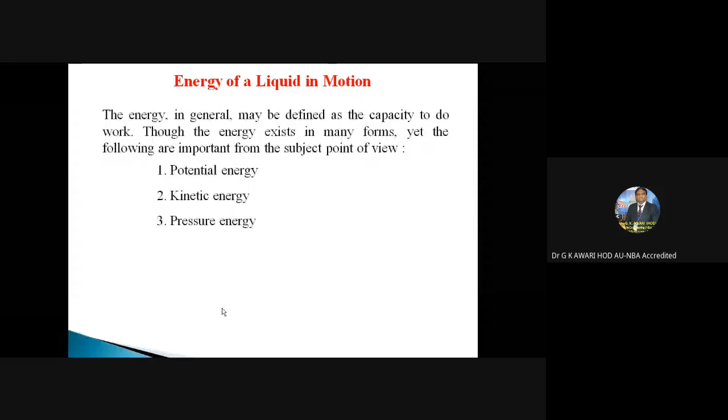And you know that energy can neither be created nor be destroyed, but one form of energy can be converted into another form of energy. So we can see in subsequent slides that pressure energy gets converted into kinetic energy. We have studied these examples also in the subject of fluid power.

So what do you mean by potential energy? Potential energy of a liquid particle in motion is the energy possessed by a liquid particle by virtue of its position. If a liquid particle is z meters above the horizontal datum, the potential energy of the particle will be z meter kilogram, briefly written as mkg per kg of the liquid. The potential head of the liquid at that point will be z meters of liquid.

For example, take the application of your hostel, your house, or a flat scheme: there is an overhead tank. In the overhead tank, a certain quantity of water is there. In that case, the level of water in the tank measured from the bottom level, which is the datum, gives the potential energy.

So when you are not using the water at the outlet end, at the user's end, the energy possessed by a liquid is nothing but the potential energy due to the datum difference. Similarly, the water in the lake, even though it is stationary, possesses potential energy. So potential energy is due to the difference in z, that is datum, and it is expressed in terms of meters of liquid.

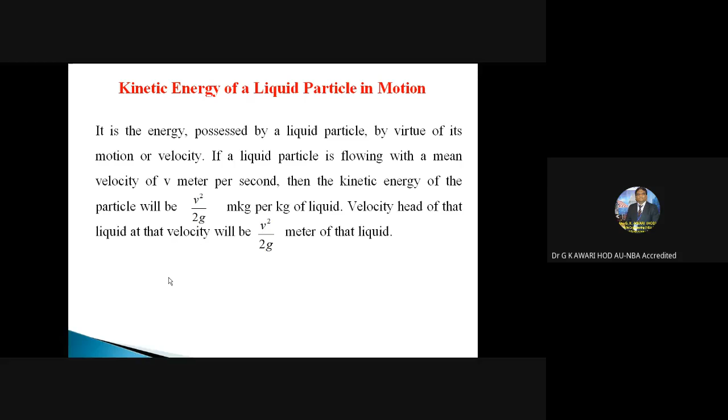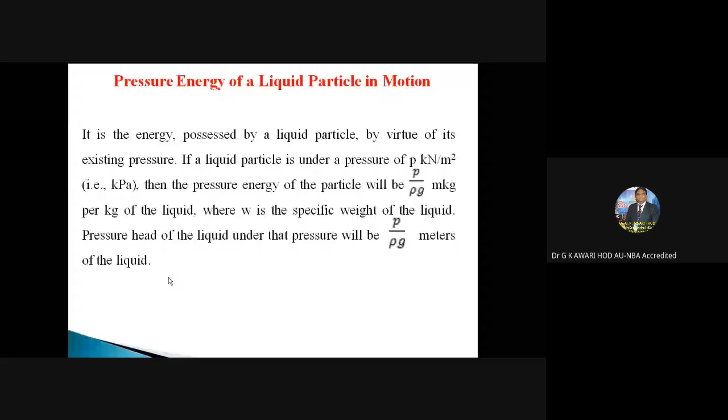Then the pressure energy of a liquid particle in motion. It is the energy possessed by a liquid particle by virtue of its existing pressure. If a liquid particle is under a pressure of P kilonewton per meter square, that is kilopascal, then the pressure energy of that particle will be P by rho g, m kg per kg of the liquid, where W is the specific weight of the liquid. Pressure head of the liquid under that pressure will be P by rho g meters of the liquid. So this is the pressure energy.

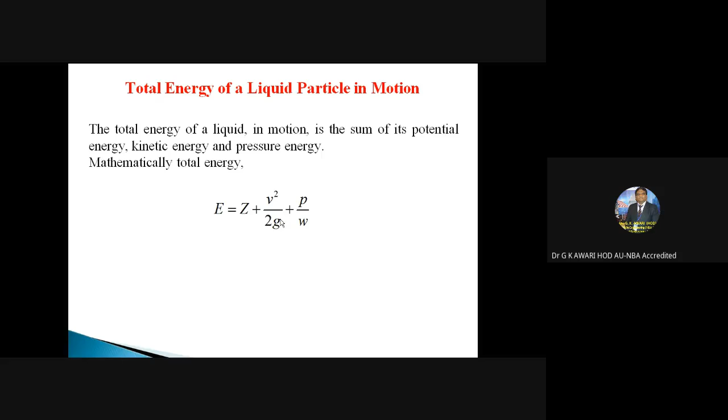Then what is the total energy of a liquid particle in motion? The total energy of a liquid in motion is the sum of its potential energy, kinetic energy, and pressure energy. Mathematically it can be expressed as E = Z + V²/2g + P/W. Z is the potential energy, V²/2g is the kinetic energy, and P/W is the pressure energy. The summation of these three energies gives us the total energy of a liquid particle in motion.

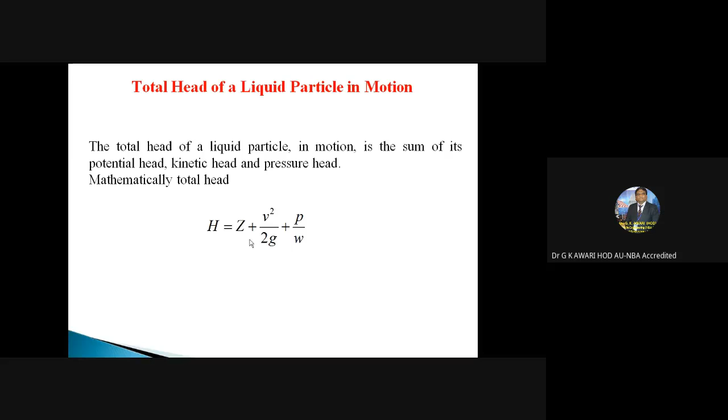Then similarly, total head of a liquid particle in motion. The total head of a liquid particle in motion is the sum of potential head, kinetic head, and pressure head. It is expressed as H = Z, the datum head, plus V²/2g plus P/W.

Bernoulli's equation was developed by Daniel Bernoulli in 1738. It states that for a perfect incompressible liquid flowing in a continuous stream, the total energy of a particle remains the same while the particle moves from one point to another. This statement is based on the assumption that there are no losses due to friction in the pipe. Mathematically, Bernoulli's equation can be expressed as Z + V²/2g + P/W = constant.

Z is potential energy, V²/2g is kinetic energy, and P/W is pressure energy. What assumptions are made by Bernoulli? Assumption number 1: no work or heat interaction between the fluid element and the surroundings takes place. The fluid must be incompressible, like liquids or water. Friction by viscous forces has to be negligible.

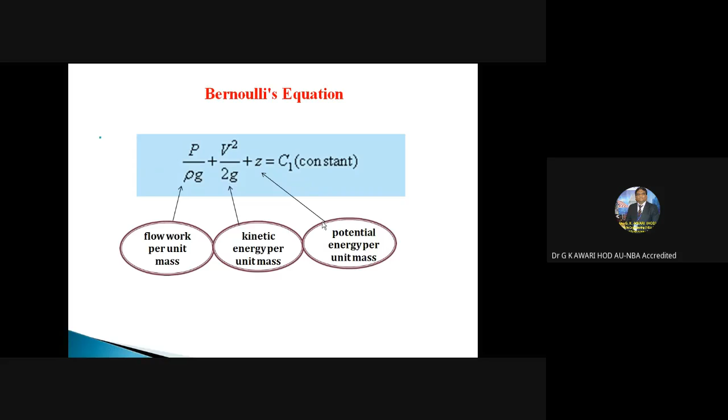So what the Bernoulli's equation suggests is that P by rho G plus V square by 2G plus Z is equal to C1, a constant, which means that at the two cross sections we have seen earlier, P1 by W plus V1 square by 2G plus Z1 is equal to P2 by W plus V2 square by 2G plus Z2. Because the total energy of a fluid remains constant. This is what has been stated by the Bernoulli's theorem.

Now, the same thing is being given here. That is, P1 by rho G plus V1 square by 2G plus Z1 is equal to P2 by rho G plus V2 square by 2G plus Z2 plus HF. What is HF? HF is nothing but the head loss due to friction. In the flow through pipe presentation, we are going to see this HF also. So this HF is added in the right hand side of the equation, means P2 by rho G plus V2 square by 2G plus Z2 plus HF.

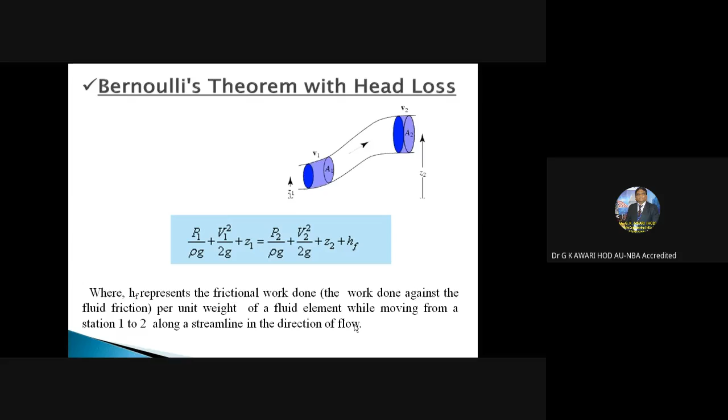We added it at cross section 2, because I have assumed the direction of flow of liquid in the upward direction from left to right. If I assume the direction of flow of water from right to left, means top to bottom, in that case this HF will be added into the left hand side of the equation. So basically HF represents the work done against fluid friction per unit weight of a fluid element while moving from station 1 to 2 along a streamline in the direction of flow. So the Bernoulli's theorem says that the total energy of the fluid remains constant at various cross sections.

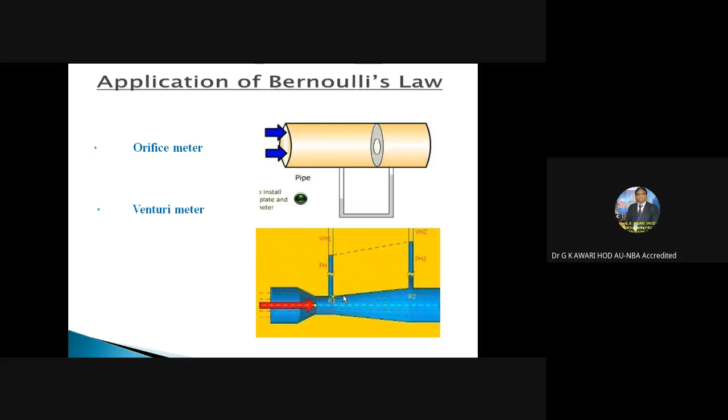Similarly, this is the second application of the Bernoulli's law, that is the Venturi meter. So you can see that the converging section, throat section and diverging section are there, and the manometer is connected to the two parts of the Venturi meter so that we can measure the pressure difference, and accordingly we can calculate the flow rate of the liquid. Now let us see the venturimeter.

The diagram is in front of you. So basically, a venturimeter is a device used for the measurement of flow in a pipeline based on the principle of Bernoulli's theorem. It consists of three parts: converging cone, short cylindrical throat, and a diverging cone. So this is nothing but your inlet section. The diameter of the inlet section is equivalent to the diameter of the pipeline where it is connected. This is your outlet section. Again, the diameter will be the same as the outlet diameter of the pipeline.

But here you can see that this portion is different. This is called the converging section. This is the throat section, and this is the diverging section. So when the fluid passes through this converging section, there is a reduction in the cross-sectional area. Because of that, the pressure energy gets converted into kinetic energy. So this converging section is like a nozzle. You might have observed the fire brigade. I will quote the example of the fire brigade.

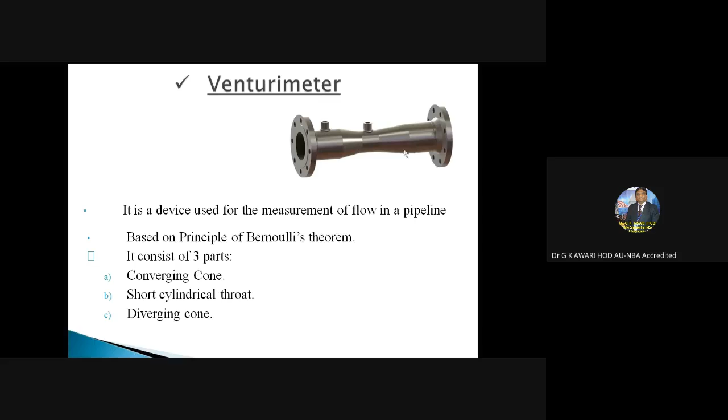So you can see that this is the throat section, and this is basically the diverging section. At this moment, you can observe that the length of the diverging section is more than the length of the converging section. So let us see now the converging section and the diverging section. The function of the converging section is to accelerate the flow and create a pressure difference between the inlet to converging cone and the throat.

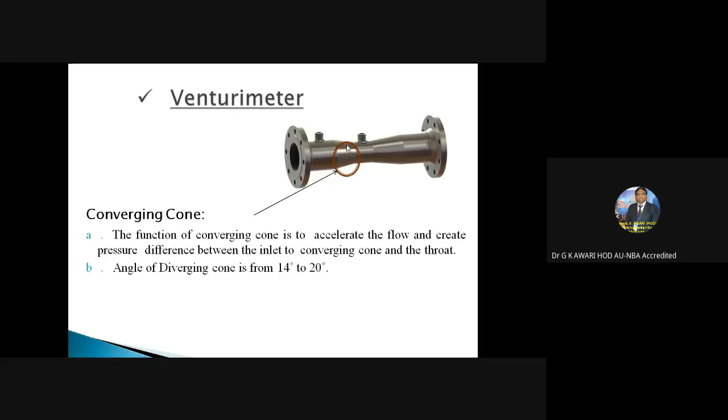And the angle of the converging cone is 14 to 20 degree. So the normal angle which is kept in the design of the venturimeter is 14 to 20 degree. So in this portion of the venturimeter, the fluid is getting accelerated. Okay, this is the throat section, that is short cylindrical throat.

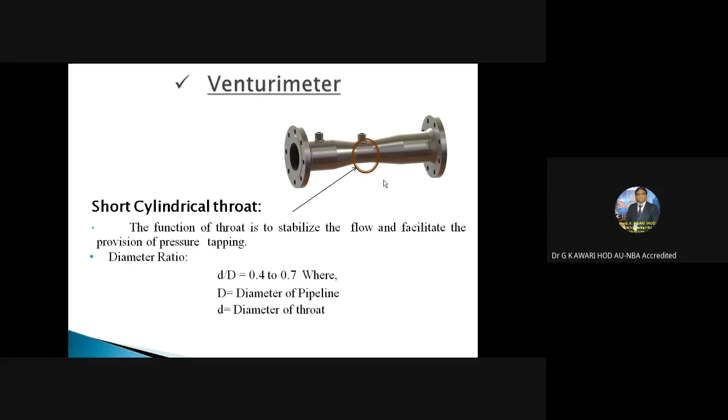The function of the throat is to stabilize the flow and facilitate the provision of pressure tapping. Okay, means here the pressure tapping is attached so that the pressure difference from the inlet to the throat section can be measured, and the diameter ratio, that is throat diameter, is 0.4 to 0.7 times of the diameter of the pipeline. This is the thumb rule or the normal design. Capital D is the diameter of the pipeline, small d is the diameter of the throat. So the diameter of the throat is 0.4 to 0.7 times the diameter of the pipeline.

Therefore, now we will go to the diverging section. The function of the diverging cone is to reduce the velocity and increase the pressure to its original value to the extent it is possibly practical. So the angle of the diverging cone is from 5 to 7 degree. वहाँ 14 से 20 डिग्री था, यहाँ 5 से 7 डिग्री है. So there is a difference between the angles. Here the angle is less, means the length of the diverging cone is more than the converging cone.

So why such a difference is there? The reason is that in this part of the venturimeter, the fluid is being retarded. The kinetic energy of the fluid passing through the diverging cone is reduced, and then we are regaining our pressure energy. So during the retardation of the fluid, there are energy losses and eddies formation in this part of the venturimeter. To minimize the energy losses and the eddies formation, the angle of the diverging cone is kept as 5 to 7 degree compared with 14 to 20 degree in case of the converging cone. So this is basically the reason.

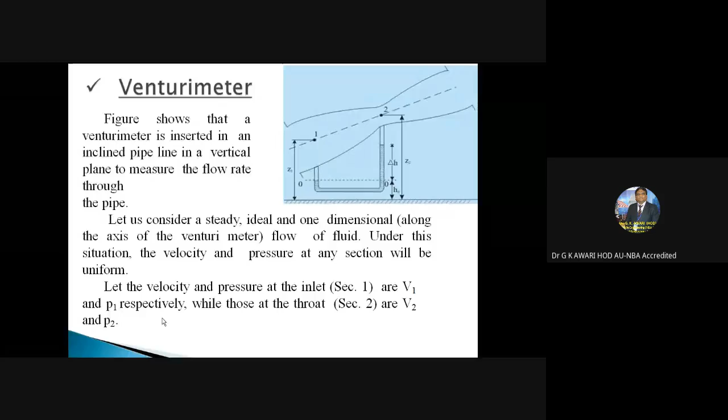So let the velocity and pressure at the inlet section, section 1, be V1, P1 respectively, and those at the throat section be V2 and P2. Now applying Bernoulli's equation between section 1 and section 2: P1/ρg + V1²/2g + Z1 = P2/ρg + V2²/2g + Z2. Bernoulli's equation says that total energy remains constant. Yeah, equal की sign दे दी. Then taking the velocity term and pressure term on one side: (V2² − V1²)/2g = (P1 − P2)/ρg + (Z1 − Z2).

Where ρ is the density of the fluid flowing through the venturimeter. From the continuity equation, ρ1A1V1 = ρ2A2V2. But naturally the liquid is incompressible, so ρ1 = ρ2, which means the ρ factor will get cancelled. So what is the value of Q? Q is nothing but A2V2 = A1V1.

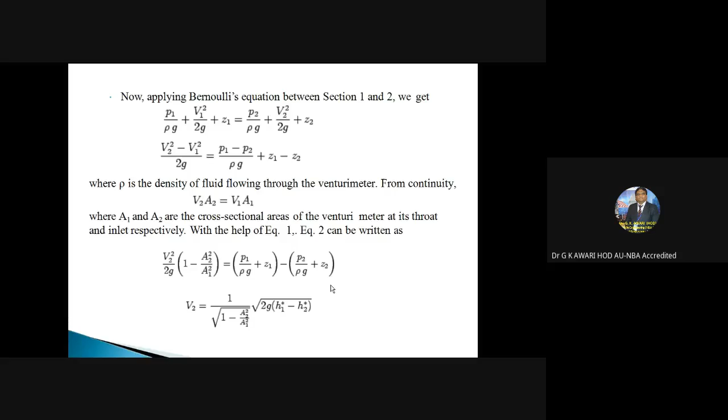So by putting this value in this equation, finally we will get the velocity of the liquid at the throat point is equal to 1 by square root of 1 minus A2 square divided by A1 square, multiplied by square root of 2g in bracket H1 minus H2. What is H1 minus H2? It is basically the manometric difference. A2 and A1, you know that it is the area at the throat section and area at the inlet section.

So H1 is equal to P1 by rho g plus Z1 and H2 is equal to P2 by rho g plus Z2. And finally, the volume flow rate through the pipe is given by Q is equal to A2 V2 is equal to A2 divided by square root of 1 minus A2 square divided by A1 square, multiplied by square root of 2g in bracket H1 minus H2. This is the equation of discharge of flow through venturimeter.

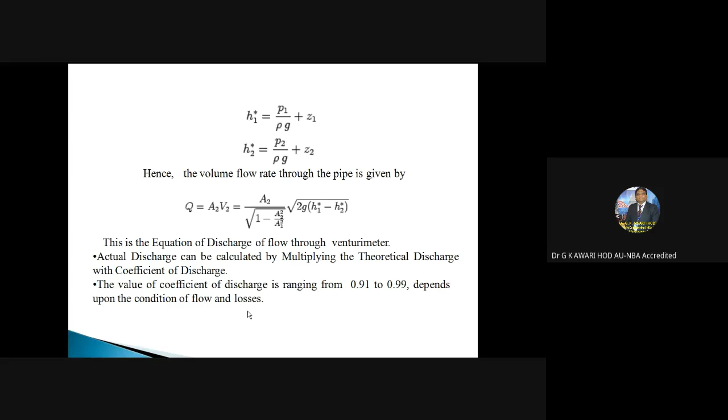Actual discharge can be calculated by multiplying the theoretical discharge with coefficient of discharge. The value of coefficient of discharge in case of venturimeter varies from 0.91 to 0.99, depending upon the condition of the flow and losses. So what is the coefficient of discharge? Actual discharge divided by the theoretical discharge is nothing but the CD, coefficient of discharge. So theoretical discharge will be more than the actual discharge.

So what are the merits and demerits of a venturimeter? The recovery of pressure is near the original value, because CD is very high. Loss of energy is minimum. Demerits are its cost is high, and it occupies more space than the orifice meter.

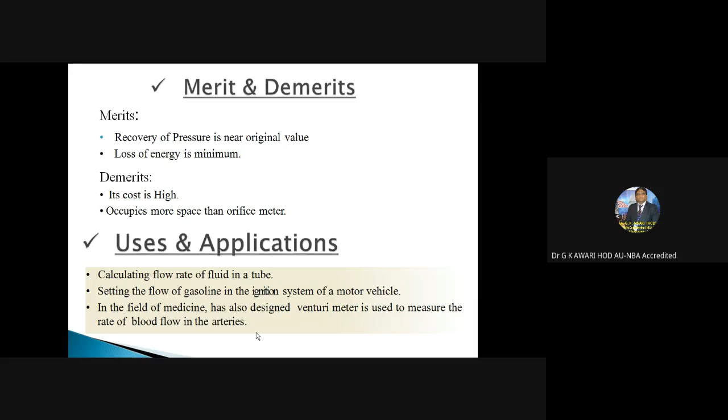Uses and applications: calculating flow rate of a fluid in a tube, setting the flow of gasoline in the ignition system of a motor vehicle. In the field of medicine, the venturimeter is used to measure the rate of blood flow in the arteries. So in the medical field, in various fields, even in industry, to measure the flow of fluid, flow of liquids or flow of water, we can use this venturimeter. So this is the first application of venturimeter.

Let us come to the second application, that is nothing but the orifice meter. The orifice meter may be installed in a pipeline with a minimum of trouble and expense. So what you can see is that this is the orifice meter, and this is the orifice plate. It is like a simple plate with a small hole, and there is a sudden contraction in the area. For example, the flow of liquid is from this direction.

Then what will happen? This orifice plate offers obstruction because of the small hole. There is a decrease in the area, and due to this, the pressure energy gets converted into kinetic energy, and at the point of the vena contracta the velocity will be more and pressure energy will be minimum. With this manometer we are measuring the pressure difference between point 1, that is the inlet section, and the point of vena contracta.

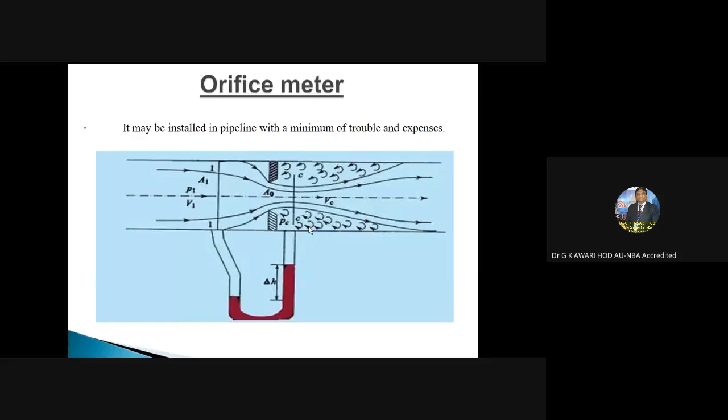And you can see that in case of the orifice meter, these circles, these lines which you can see, are all eddies formation, meaning energy loss is taking place. Why is it taking place? In case of the venturimeter, there is a gradual conversion of the pressure energy into velocity energy. But in case of the orifice meter, there is a sudden reduction in the area of the pipeline. Therefore, energy loss is more in the orifice meter, and that's why the orifice meter has a lower value of CD.

So what is the value of the CD? The coefficient of discharge is 0.6 to 0.65, meaning actual discharge is 0.6 times the theoretical discharge. So the orifice meter is a device to determine the rate of flow through the pipe. It consists of a flat circular plate which has a sharp-edged circular hole called the orifice. It is fixed concentric to the pipe.

The orifice diameter is generally kept half of the diameter of the pipe, and it is based on the same principle as explained in the venturimeter. But compared with the venturimeter, this orifice meter is economical and less space is required for fitting.

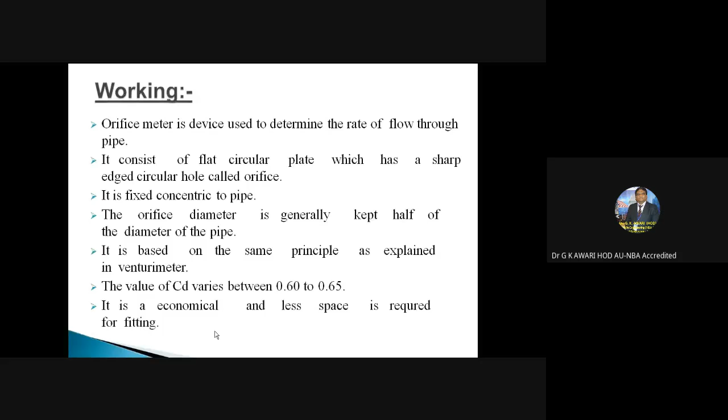So, the difference between an orifice meter and the venturimeter: for the venturimeter, there is no contraction; the area of the jet is always equal to the area of the throat. The orifice meter, by contrast, is much more affected by the variations in Cc and by the variations in Cv. Okay, so after these two applications, let us go to the next application, that is the pitot tube.

The pitot tube is a simple device used for measuring the velocity of a flow at the required point in a pipe or stream. It is also called the impact tube or stagnation tube. There is always an MCQ based on the pitot tube in the GATE examination, the IES examination, or other competitive examinations, so try to study this topic well.

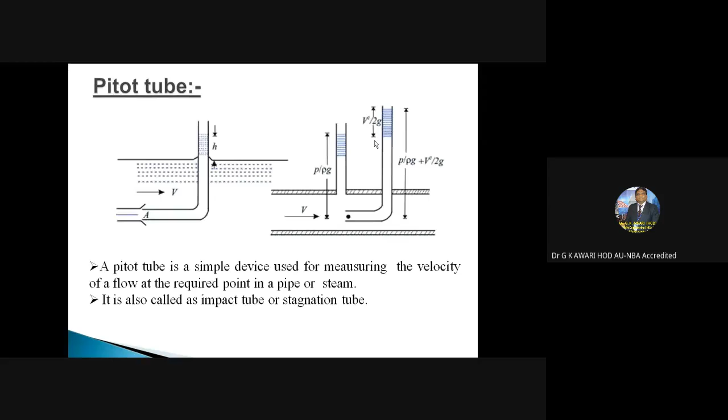A nozzle-like shape is given here at the entrance of the pitot tube. Because of that, the flowing fluid comes to rest at the inlet point of the pitot tube. That point is nothing but the stagnation point. Due to the stagnation point, there will be a pressure difference, which is recorded in the pitot tube, and from it we calculate the velocity of the fluid flowing through the pipeline.

The basic pitot tube consists of a tube pointing directly into the fluid flow. As this tube contains fluid, a pressure can be measured. The moving fluid is brought to rest, as there is no outlet to allow flow to continue. This pressure is the stagnation pressure of the fluid, also known as the total pressure or the pitot pressure. The measured stagnation pressure cannot itself be used to determine the fluid flow velocity. However, Bernoulli's equation states that stagnation pressure is equal to static pressure plus dynamic pressure.

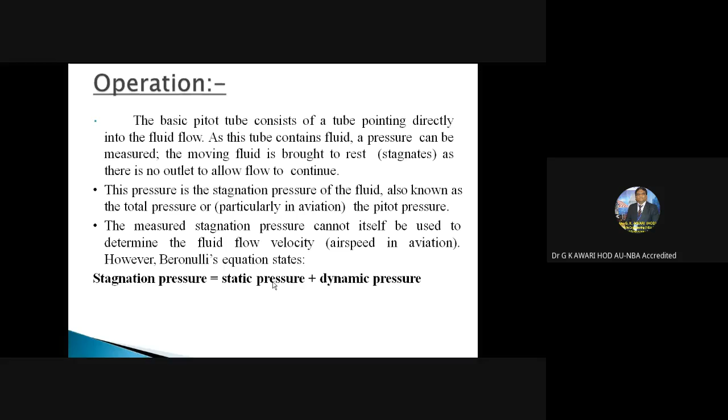So this is the first part of today's presentation. I have covered Bernoulli's theorem, Bernoulli's law, and its principle. Then I covered its applications, that is, the venturimeter, the orifice meter, and the pitot tube. So let me review like last time and ask you some questions, and then we will proceed with the next part of my presentation. Can anybody answer which topics we have covered till now? In the first part of the presentation, which topics have we covered?

Vinay is there. Vinay, Sanket Dhokle. Hello, who is speaking? Energy of liquid in motion, Bernoulli's equation. Yes, Tamgadge, Bernoulli's equation we have studied. Yes, very good. Applications of Bernoulli's theorem: orifice meter, venturi meter. Very good, Tamgadge. Okay.

And the pitot tube. Now, the next question is: what is the purpose of the pitot tube? What is the pitot tube used for? Any others? Measuring the pressure of the flow? No, that is wrong. I told you, this is for competitive examinations. The pitot tube is not used for measuring the pressure or the flow rate of the liquid. Measuring the velocity of the flow at the required point? Yes, Amir, very good. The pitot tube is used for measuring the velocity of the fluid flowing through the pipe.

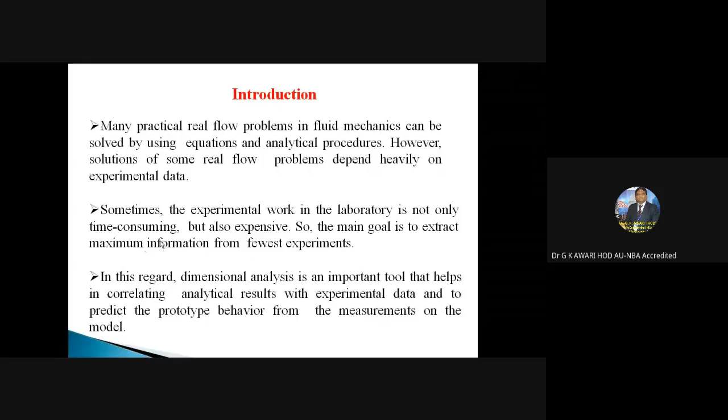So many practical real flow problems in fluid mechanics can be solved by using equations and analytical procedures. However, solutions of some real flow problems depend heavily on experimental data. Sometimes the experimental work is not only time consuming but also expensive. So the main goal is to extract maximum information from the fewest experiments. In this regard, dimensional analysis is an important tool that helps in correlating analytical results with experimental data and to predict the prototype behavior from the measurements on the model.

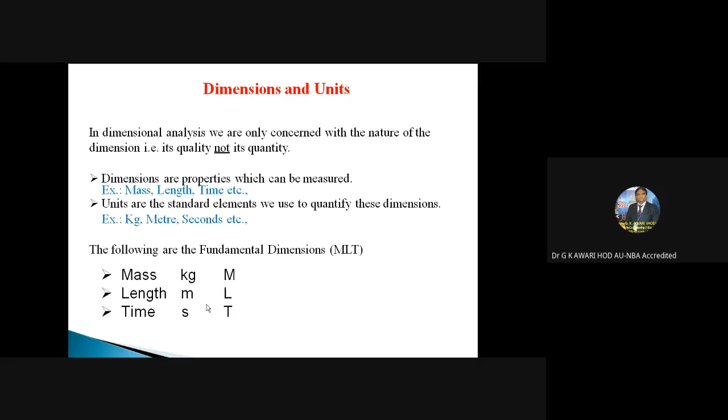The following are the fundamental dimensions, which we also studied last time. It is nothing but MLT: mass, length and time. Then the secondary or derived dimensions. Secondary dimensions are those quantities which possess more than one fundamental dimension, that is area is meter square, volume meter cube, that is L square, L cube; kinematic, that is velocity meter per second, acceleration meter per second square, and its dimensions you can see are L by T, L by T square.

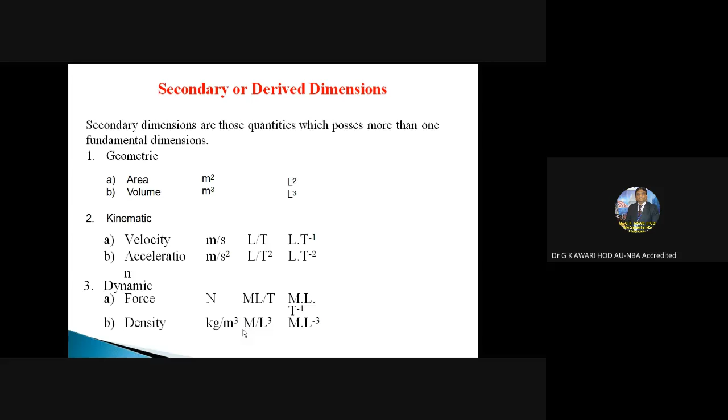Then the dynamic, that is force and density, MLT. Newton is nothing but ML divided by T squared. Here density is kg per meter cube, so M divided by L cube. So what is the use of dimensional analysis? Conversion from one dimensional unit to another. Checking units of equations, dimensional homogeneity. Defining dimensional relationships using the Rayleigh method and the Buckingham Pi method, and the fourth one is model analysis. So these are the applications of dimensional analysis.

Then dimensional homogeneity. Dimensional homogeneity means the dimensions on both sides of an equation are equal. Let us consider the equation V equals square root of 2gh. Dimensions on the left hand side: V is L by T, so LT to the power of -1. Dimensions of the right hand side are also LT to the power of -1. So the left hand side equals the right hand side, and therefore the equation V equals root of 2gh is dimensionally homogeneous. It can be used in any system of units. So dimensional homogeneity can be tested like that.

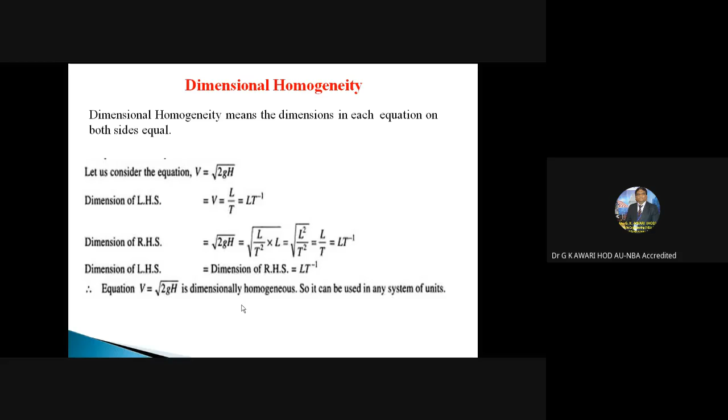So this equation is V equals square root of 2gh. We have determined the dimensions of the left hand side, which come out to be LT to the power of -1. The dimensions of the right hand side are also LT to the power of -1, which means that this equation, V equals square root of 2gh, is dimensionally homogeneous. Similarly, a dimensionally non-homogeneous equation can be tested. So this is the use of dimensional analysis, which is mostly used in the design of the turbine, the pump, or the hydroelectric power station.

Similarly, another method is there, called the Rayleigh method. The Rayleigh method is used to define the relationship among variables. This method is used for determining the expression for a variable which depends upon a maximum of 3 or 4 variables only. Methodology: let x be a function of x1, x2, x3; mathematically it can be written as x equals function of x1, x2, x3.

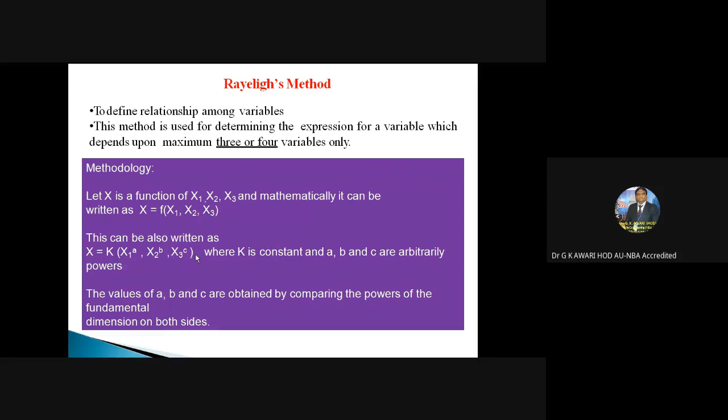So this can be written as x equals constant k times x1 to the power of a, x2 to the power of b, x3 to the power of c, where k is a constant and a, b, c are arbitrarily chosen powers. The values of a, b and c are obtained by comparing the powers of the fundamental dimensions on both sides. So this is the Rayleigh method. Let us take one example of the Rayleigh method.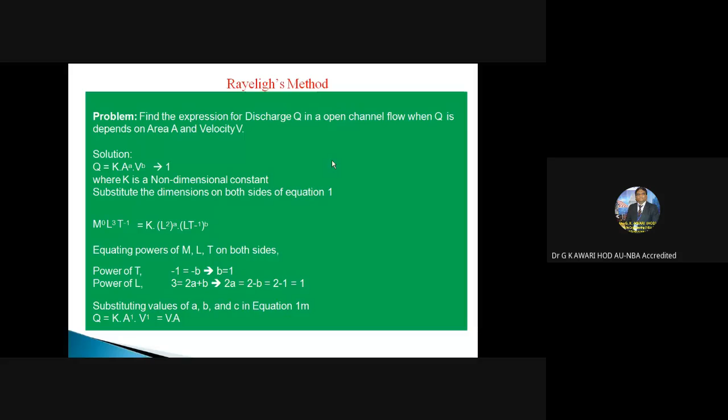So again, we check the dimensional homogeneity of the expression of Q with the help of the Rayleigh method. Similarly, the second equation is given: find the equation for the power developed by a pump if it depends on H, that is head, the discharge Q and specific weight gamma of the fluid.

Power is expressed as L² M T^-3. Head is expressed as L M^0 T^0. Discharge L³ M^0 T^-1. Similarly, specific weight, and put it here in the equation. So you can find out the value of c, b and a, and substitute these values of a, b, c in the equation.

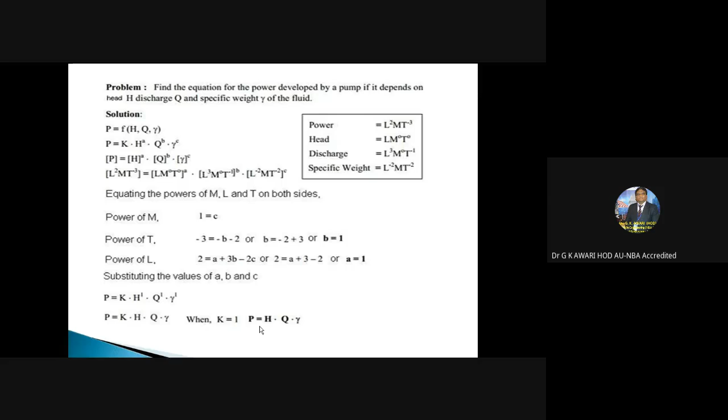So you will find out that K is equal to 1, and the equation of power P which we just found out with the help of the Rayleigh method is equal to H into Q into gamma. So this is the equation of power.

This is equation number 3: find the expression of drag force R on a smooth sphere of diameter D moving with a uniform velocity V in a fluid of density rho and dynamic viscosity mu. The function is given: force L M T^-2, mass density L^-3 M T^0. Substituting these values and equating the powers of M, T, L, finally we get R = rho V² D² phi(rho V D / mu).

So considering all these factors, by equating the powers of M, T and L, we find this equation expressing the drag force on a smooth sphere of diameter D moving with velocity V in a fluid of density rho and dynamic viscosity mu.

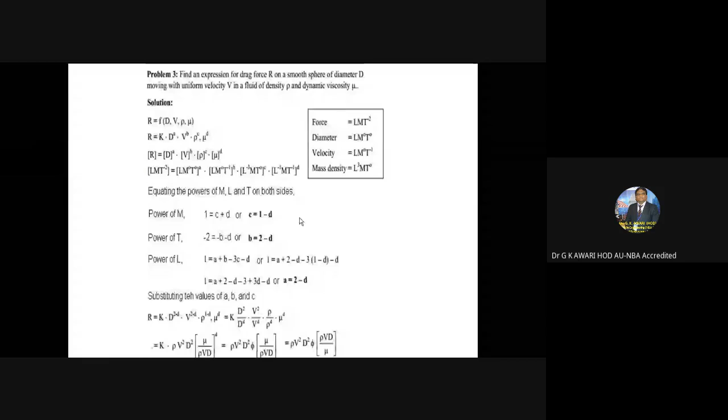Similarly, the Buckingham pi theorem. This method of analysis is used when the number of variables is more. When 3 to 4 variables are there, the Rayleigh method is easier to apply. But with the Buckingham pi method, even complicated problems where the number of variables is more can be solved.

So if there are n variables in a physical phenomenon and those n variables contain m dimensions, then the variables can be arranged into n minus m dimensionless groups called pi terms. So if f is a function of x1, x2, x3 up to xn, and the variables can be expressed using m dimensions, then f is a function of pi1, pi2, pi3 up to pi n minus m, where pi1, pi2, pi3 are dimensionless groups.

So each pi term contains m plus 1 variables, out of which m are of the repeating type and one of the non-repeating type. Each pi term is dimensionless, and dimensional homogeneity can be used to get each pi term. So pi denotes a non-dimensional parameter.

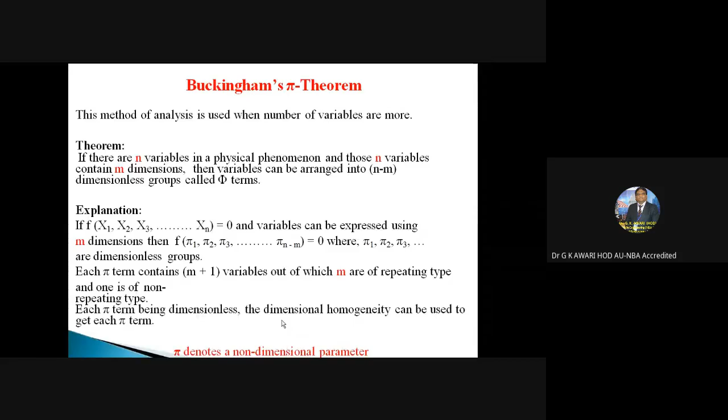Selecting the repeating variables: avoid taking the quantity required as a repeating variable. Repeating variables put together should not form dimensionless groups. No two repeating variables should have the same dimensions. Repeating variables can be selected from each of the following properties: geometric properties, which are nothing but length, height, width, and area; flow properties, like velocity, acceleration, and discharge; fluid properties like mass density, viscosity, and surface tension.

Okay. So taking the example of the Buckingham pi theorem method: the pressure difference delta P in a pipe of diameter d and length L due to viscous flow depends on the velocity v, viscosity mu, and density rho. Using Buckingham pi theorem, obtain an expression for delta P. So delta P is a function of d, L, v, mu, rho. So the total number of variables here is 6, so n is equal to 6. The total number of fundamental dimensions, m, is equal to 3.

So how many pi terms will there be? n minus m, so 6 minus 3, 3 pi terms will be there. Hence the equation is expressed as a function of pi1, pi2, pi3. Now each pi term contains m plus 1 variables, that is 3 plus 1, 4 variables. Out of the 4 variables, 3 are repeating variables.

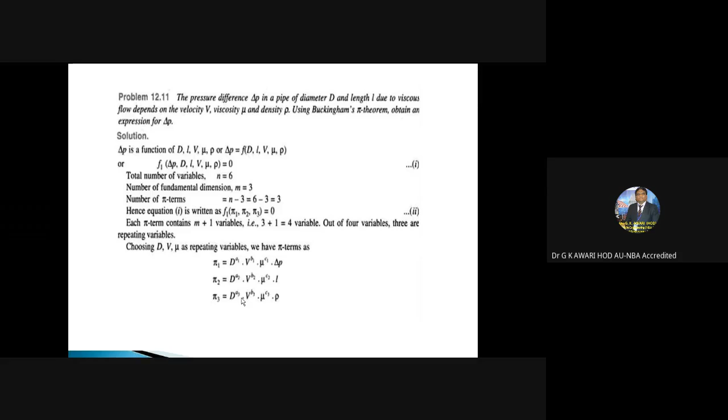Now choosing d, v, mu as repeating variables, we have the pi terms: pi1 is equal to d to the power of a1, v to the power of b1, mu to the power of c1, and delta P. Similarly, pi2 is equal to d to the power of a2, v to the power of b2, mu to the power of c2 into L. Pi3 is d to the power of a3, v to the power of b3, mu to the power of c3, and rho. Okay. So determining the first pi term, second pi term, and the third pi term. So pi1 is the equation which you have seen.

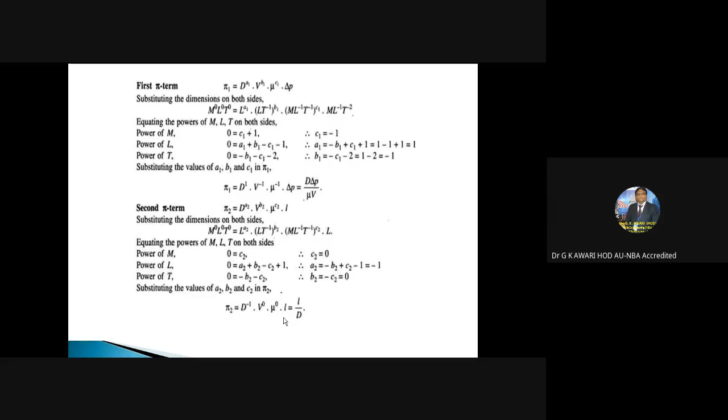Similarly, we will find out the equation for the second pi term. The second pi term is pi2 is equal to d to the power of a2, v to the power of b2, mu to the power of c2, into L. So equating this one, we get the second pi term as L by D. Similarly, we determine the third pi term. Okay. Pi3 is equal to d to the power of a3, v to the power of b3, mu to the power of c3 into rho.

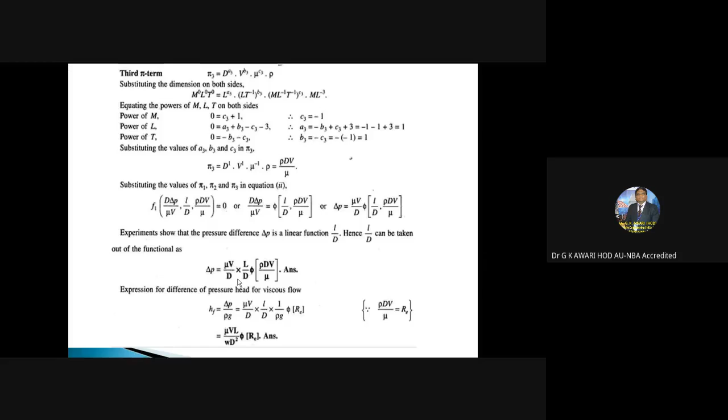So substituting this in the MLT equation, finally we get that the pressure difference delta P is a linear function of L by D. Hence L by D is taken out of the function. So delta P is equal to mu V divided by D into L by D phi of rho D V by mu, which is nothing but the answer for delta P, the expression for difference of pressure head for a viscous flow. Okay. So likewise, you have to use the Buckingham pi theorem for finding out the pi terms and finding out the expression by equating the powers of M, L, T.

Okay, model analysis. For predicting the performance of hydraulic structures such as dams and spillways, and hydraulic machines such as turbines and pumps, before actually constructing or manufacturing, models of the structures or machines are made and tests are conducted on them to obtain the desired information. In the beginning I told you that before designing the hydro power station or hydraulic turbine, the model is prepared, which is in dimensional homogeneity with the prototype. The experiments are conducted, and finally the performance is predicted, and if any modification is required in the configuration, that can be done in the model itself, so that the prototype does not go into failure.

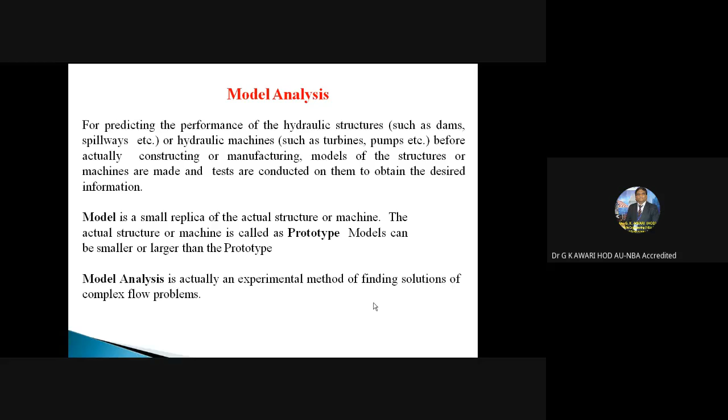Okay, so a model is basically the small replica of the actual structure or machine. The actual structure or machine is called the prototype. Models can be smaller or larger than the prototype. So model analysis is actually an experimental method of finding solutions to complex flow problems.

Okay, similitude and similarities. So what do we mean by similitude? Similitude is defined as the similarity between the model and prototype in every aspect, which means that the model and prototype have similar properties. So types of similarities: geometric similarity, length, breadth, depth, diameter, area, volume. These are the geometric similarity. Kinematic similarity, velocity and acceleration. Dynamic similarity, time, discharge, force, pressure intensity, torque, and power.

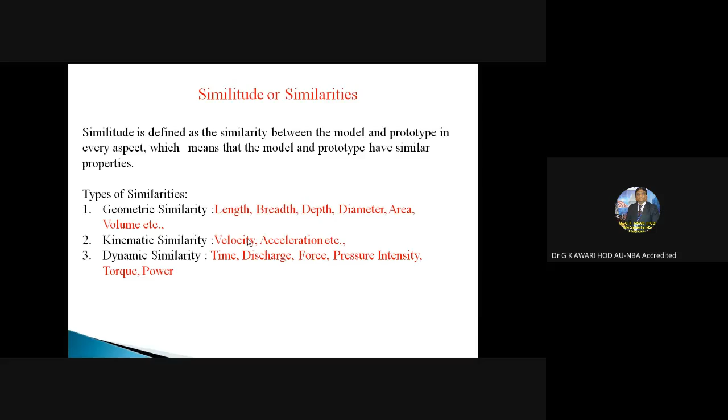So geometric similarity is said to exist between the model and the prototype if the ratios of all corresponding linear dimensions in the model and prototype are equal. Kinematic similarity. So what do we mean by kinematic similarity? That is Vp by Vm is equal to Vr, or Ap by Am is equal to Ar, where Ar is the acceleration ratio and Vr is the velocity ratio.

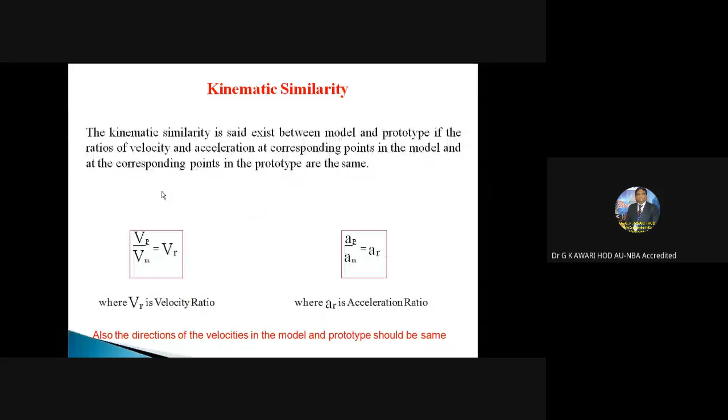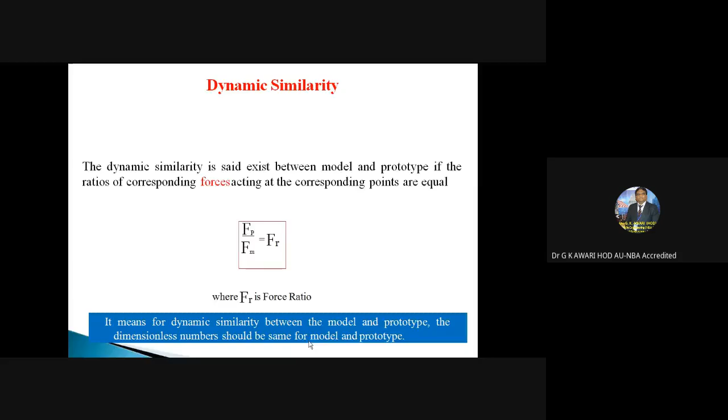Kinematic similarity is said to exist between the model and prototype if the ratios of velocity and acceleration at corresponding points in the model and in the prototype are the same. Dynamic similarity is said to exist between the model and prototype if the ratios of corresponding forces acting on the corresponding points are equal. So Fp by Fm is equal to Fr, where Fr is the force ratio. It means for dynamic similarity between the model and the prototype, the dimensionless number should be the same for the model and the prototype.

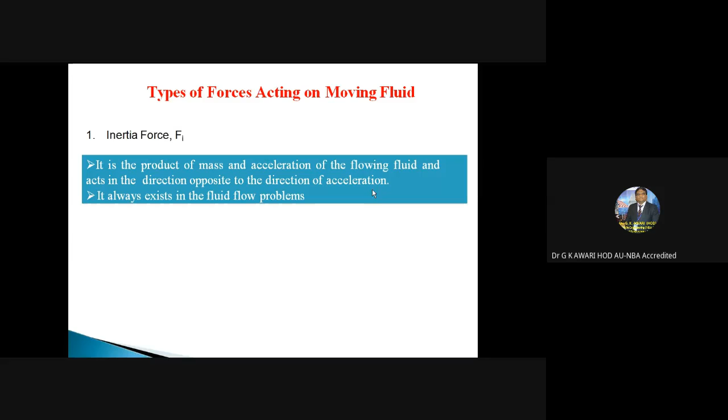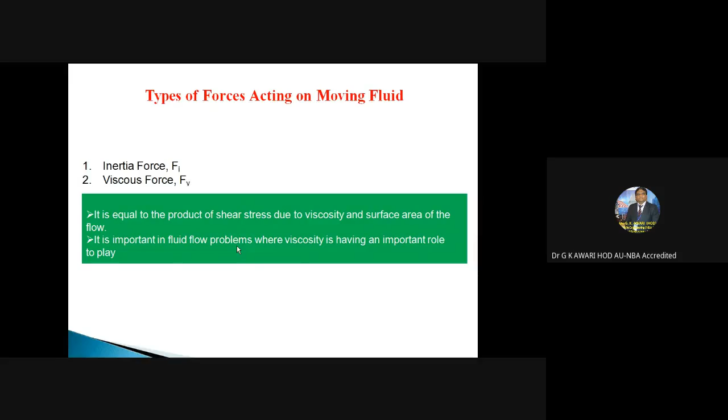Then types of forces acting on a moving fluid. So inertia force is the product of mass and acceleration of the flowing fluid and acts in the direction opposite to the direction of acceleration. It always exists in fluid flow problems. Similarly, the second type of force acting is the viscous force. It is equal to the product of shear stress due to viscosity and surface area of the flow. It is important in fluid flow problems where viscosity has an important role to play.

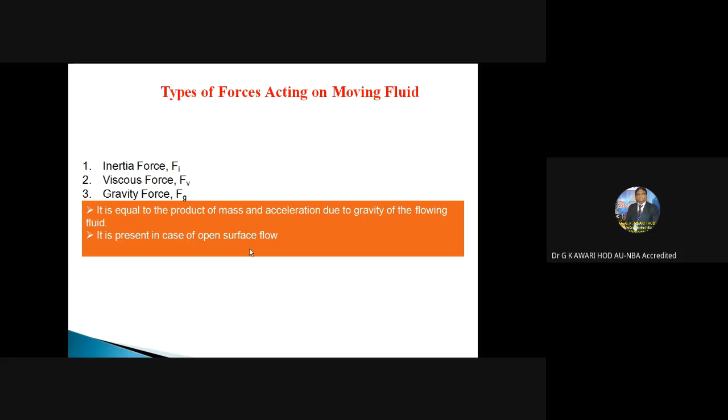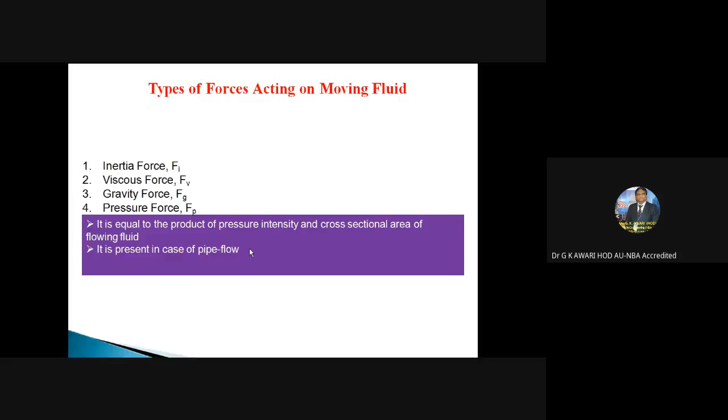Types of forces acting on a moving fluid. Okay, inertia seen, viscous seen, then the gravity force. What do you mean by the gravity force? It is equal to the product of mass and acceleration due to gravity of the flowing fluid. It is present in the case of open surface flow. The fourth force acting is the pressure force. It is equal to the product of pressure intensity and cross-sectional area of the flowing fluid. It is present in the case of flow of water or liquid in pipe flow.

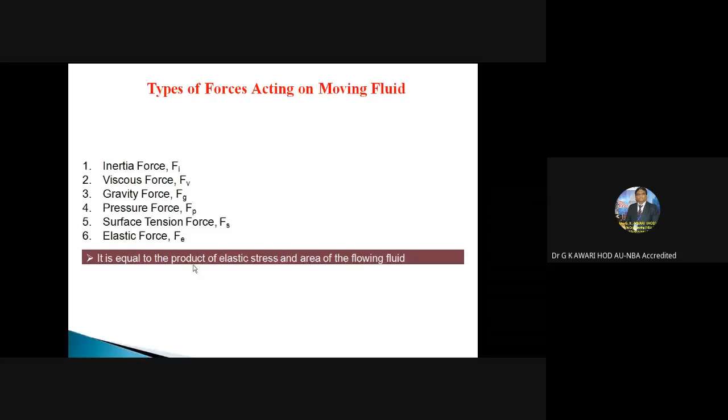Surface tension force Fs is equal to the product of surface tension and length of surface of the flowing fluid. Similarly, elastic force acting on a moving fluid. What is the elastic force? It is equal to the product of elastic stress and area of the flowing fluid.

Then let us see the dimensionless numbers. Okay, this is a very important topic in fluid mechanics, in fluid power, wherein we study these dimensionless numbers and they are used. So dimensionless numbers are obtained by dividing the inertia force by the viscous force, gravity force, pressure force, surface tension force or the elastic force.

So Reynolds number, what is Reynolds number? Reynolds number is rho v d by mu. So Reynolds number is basically inertia force by viscous force. Rho v d by mu: V is the velocity of fluid in the pipe, D is the diameter, mu is viscosity, and rho is density.

With the Reynolds number, we categorize the type of liquid flow. For example, if the Reynolds number is less than 2000, the flow is laminar. If the Reynolds number is greater than 2000, we say the flow is turbulent. You might have used this concept of Reynolds number in your laboratory experiments in fluid mechanics or fluid power. So Reynolds number is used to predict the type of flow of the liquid, that is laminar, transitional, or turbulent flow, and it is given as inertia force by viscous force.

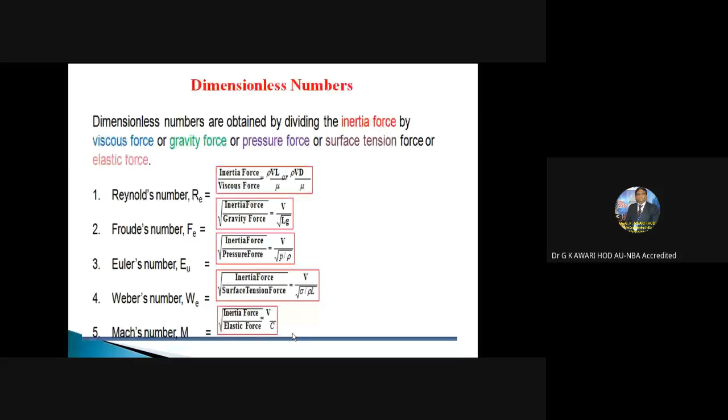So before I go to the next part of my presentation, let me take a review of which topics I have covered in the second part of my presentation. So can anybody answer what are the topics covered by me in the second part of the presentation? Yes, anyone? Akash Bavankar, Akshay Srirame. Can anybody tell me what are the topics I have covered in the second part of my presentation? Dolly Vasnik, are you here?

Dimensional analysis, in which, sir... Just a minute. First chance I will give to Shubham, then I will come to Tamgadge. Shubham. Sir, dimensional analysis, in which we studied the Buckingham Pi method and Rayleigh method. Okay, very good. Tamgadge? Bahuddan Tamgadge?

Yes, in dimensional analysis, fundamental dimensions and derived dimensions we have studied. And Rayleigh method and Buckingham method. Plus dimensionless numbers we have studied. Okay. Very good, Tamgadge. So can anybody answer what is the purpose of dimensional analysis, or what are the applications of dimensional analysis?

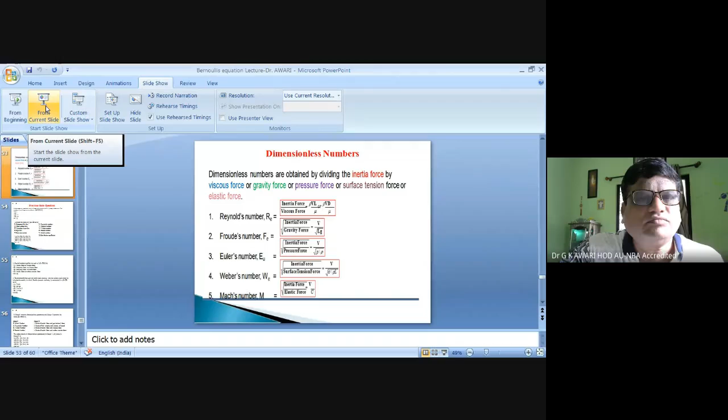So is it visible to you? My screen is visible? Can anybody tell? Yes, sir. Yes, sir. Okay, thank you.

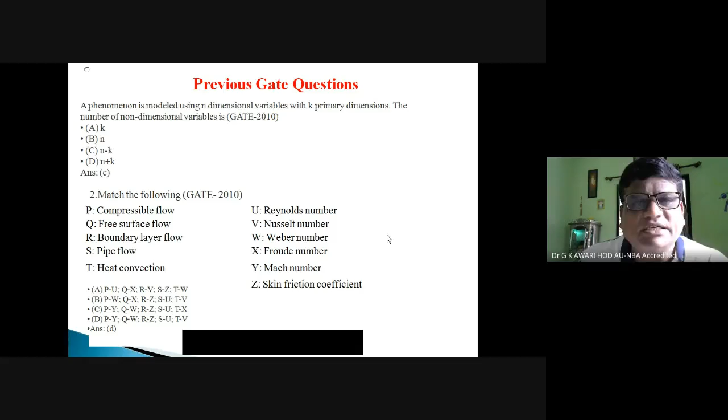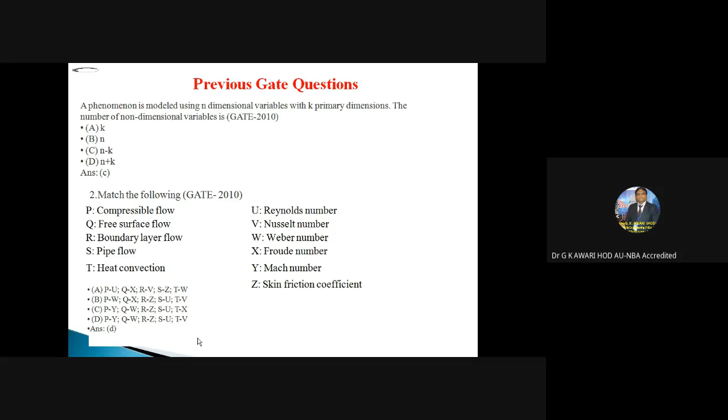So the previous GATE examination we will cover now. A phenomenon is modeled using n dimensional variables with k primary dimensions. The number of non-dimensional variables? This was the question in GATE 2010, GATE 2012. So you have to choose the correct option. Here a is equal to k, b is equal to n, c is equal to n minus k,

or n plus k. Okay, so मैंने बताया था आपको कि n minus m होता है, तो यहाँ पे k primary dimensions दिए हैं. So n minus k. The correct answer is n minus k.

Match the following. Again, this is the question from the GATE 2010 examination. Compressible flow, free surface flow, boundary layer flow, pipe flow, heat convection. So try to match it. Here, Reynolds number, Nusselt number, Weber number, Froude number, Mach number, and skin friction coefficient, six options are given. So try to match it. Which is the correct answer?

So what we can see is, let us say compressible flow. Air is compressible; gases are compressible. So naturally in compressible flow, Mach number will come into picture, that is subsonic flow, sonic flow, supersonic flow. Then the free surface flow: we have studied that the Weber number will come into picture.

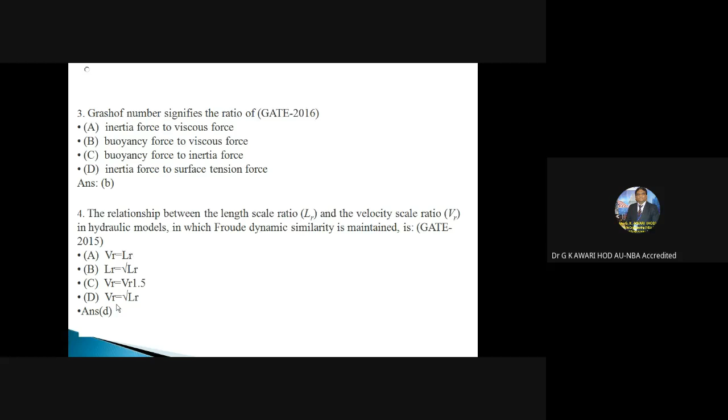The relationship between the length scale ratio LR and the velocity scale ratio VR in a hydraulic model in which Froude dynamic similarity is maintained. So this is the question of GATE 2015. The correct answer is VR is equal to root of LR.

Now the same, that is GATE 2013. Group 1 contains the dimensionless parameters and group 2 contains the ratios. You can see that this is group 1, that is Mach number, Reynolds number, Weber number, Froude number, and group 2, ratio of inertia force, gravity force, viscous force, like that. You have to choose which is the correct option.

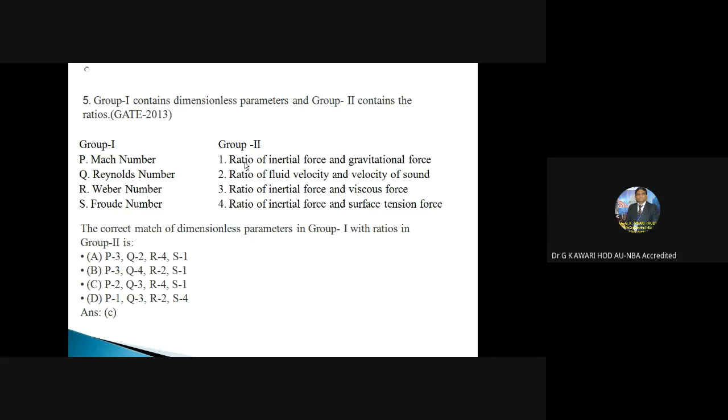And Weber number, that is the ratio of inertial force to the surface tension force. And the Froude number is nothing but the ratio of inertial force to the gravitational force. So likewise you have to answer.

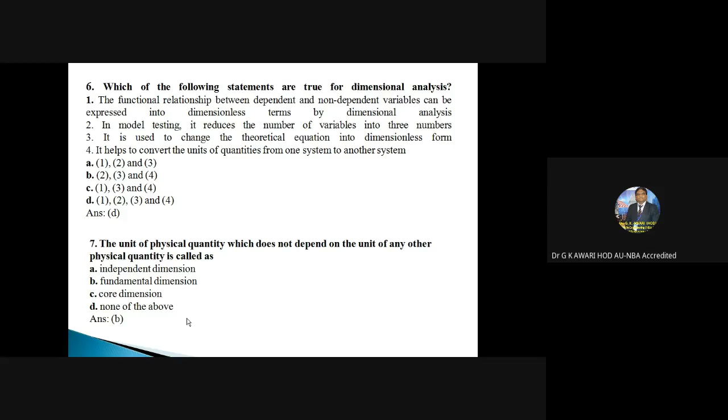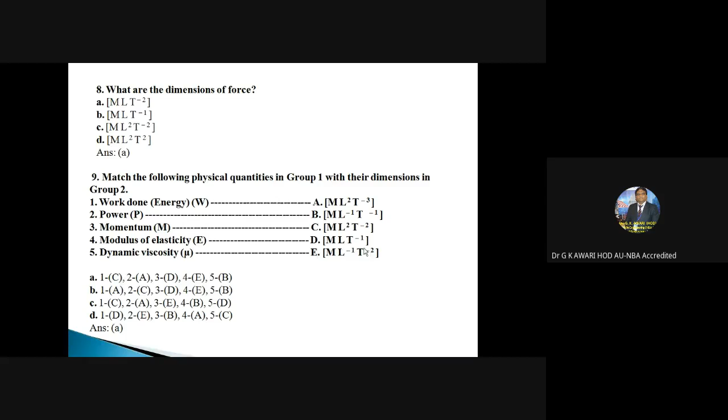Which of the following is a dimensionless equation?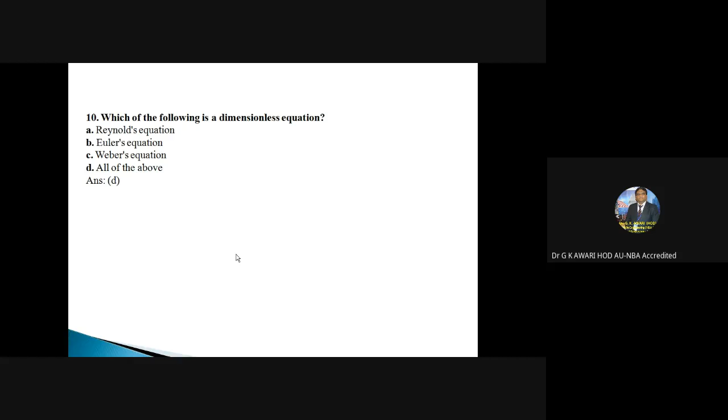So with this I conclude the first part of my presentation. Let me take the review and then we will continue with the second part of the presentation.

So let me know which topic we have covered today. Can anybody, अभी हमने क्या लिया third part of the presentation में, which topic we have covered? Manish Bhoyer, Pradeep Harinkhede. So in third topic we take previous GATE questions. Okay, Shubham, very good. Can anybody tell what was the nature of any GATE question that you have seen?

कौन से टॉपिक के ऊपर था? Manisha, can you tell? Manisha is online. Manisha Pardi, are you listening to me? Sir, dimension analysis. Yes. Okay, very good. So be on the line, Manisha. Always try to listen to what I am teaching you.

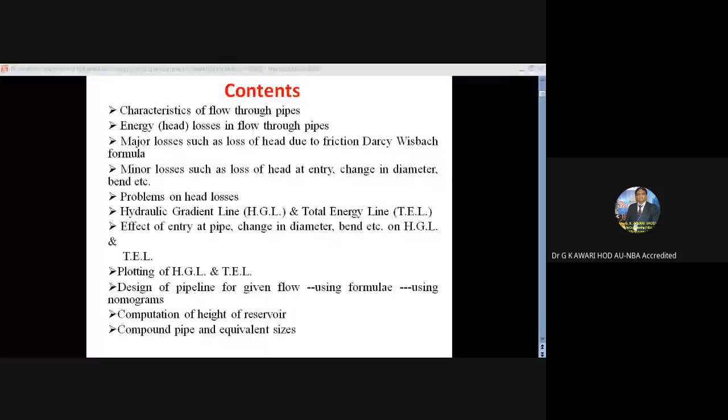Yes, sir. Clearly visible. So we will go through the next topic in fluid power, that is flow through pipes. So contents of this presentation: characteristics of flow through pipes, and the second one is the energy losses in flow through pipes. Major losses such as loss of head due to friction, Darcy-Weisbach formula. Minor losses such as loss of head at entry, change in diameter, bend.

Problems on head losses, hydraulic gradient line, total energy line, effect of entry at pipe, change in diameter, bend, plotting hydraulic gradient line and TEL, and design of pipeline for given flow using formulae, using nomograms, and the computation of height of reservoir, compound pipe and equivalent sizes. So these are the contents of this part of the presentation. Let us see how much we can cover. Because of the time limitation, we have to end somewhere in between.

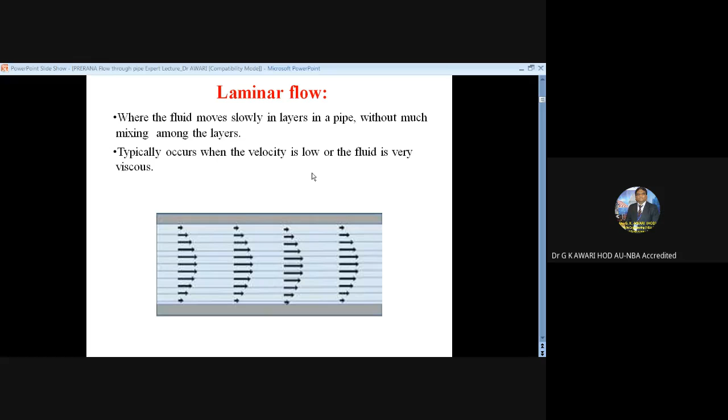So laminar flow is when the fluid moves slowly in layers in a pipe without much mixing among the layers. So you know the ink pen. When you are writing, the flow of ink from the nib is nothing but laminar flow. Turbulent flow is a different one. Laminar flow typically occurs when the velocity is low or the fluid is very viscous.

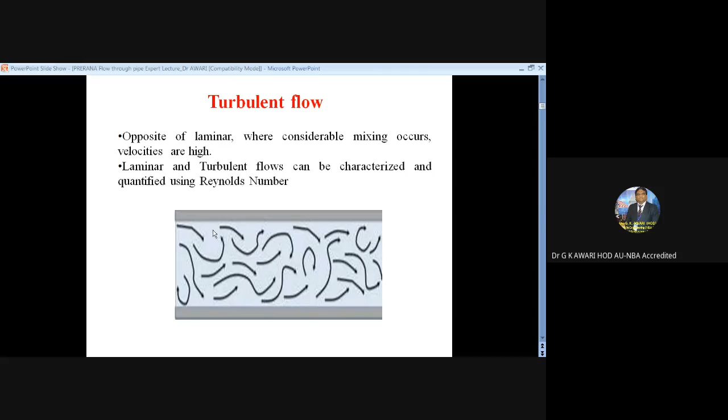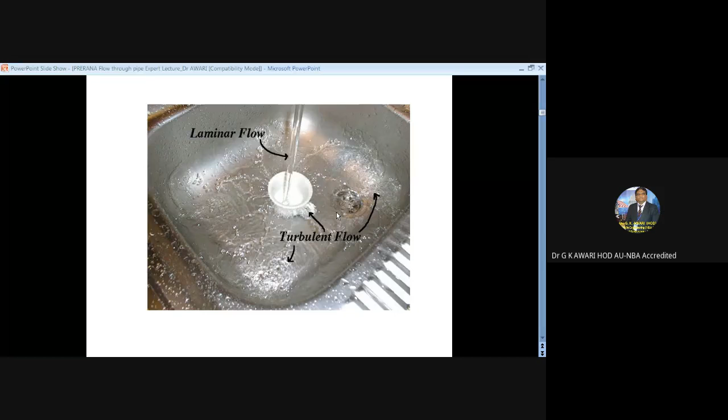Considering an example of laminar and turbulent flow, see the flow of water once you open the tap in the wash basin and put a cup there. The portion of water being issued from the tap moves in a laminar manner, and where the splashing of water takes place, there is mixing of the particles. So that flow is turbulent, and this flow is laminar. How to determine it is given by the Reynolds number rho V d by mu.

The definitions: layers of water flow over one another at different speeds with virtually no mixing between the layers. The velocity profile for laminar flow in a circular pipe is parabolic, with maximum flow in the center of the pipe and minimum flow at the pipe wall. The average flow velocity is approximately 1/2 of the maximum velocity.

Turbulent flow is characterized by irregular movement of the fluid particles. The velocity profile for turbulent flow is fairly flat across the central section and drops rapidly extremely close to the wall. The average flow velocity is approximately equal to the velocity at the center of the pipe. Viscosity is the fluid property that measures the resistance of a fluid to deforming due to shear force. For most fluids, temperature and viscosity are inversely proportional. So this is the definition of the laminar flow.

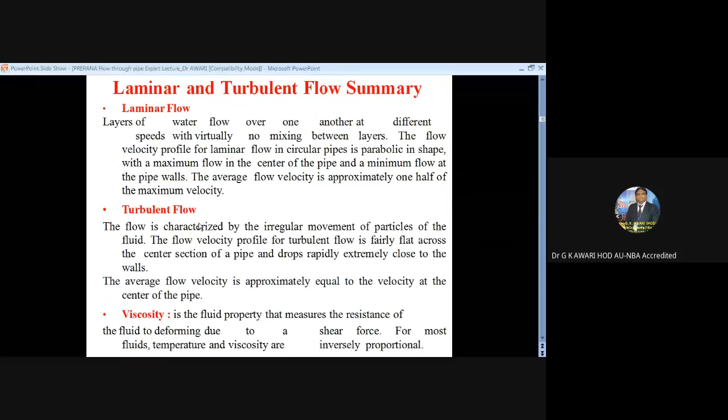Turbulent flow, and the viscosity. Now we will go to the types of the losses. So what are the various types of losses? Types of losses are majorly categorized into two: minor losses and major losses. Minor losses are nothing but sudden enlargement, sudden contraction, sudden entrance and the exit, and due to pipe fitting.

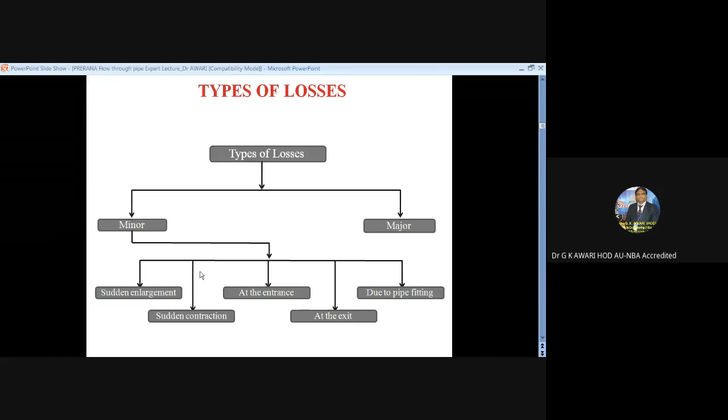So these are all the minor losses, and the major loss is nothing but the loss of head due to friction. Loss of head due to friction is termed as the major loss. It depends on the velocity of the flow, diameter of pipe and roughness. It is denoted by HF. So HF is nothing but FLV square by 2GD.

What is F? F is coefficient of friction, L is length of the pipe, V is velocity of the flow. So V square divided by 2G, G is acceleration due to gravity, and D is diameter of the pipe. So HF is equal to FLV square by 2GD, which is basically the major loss in case of the flow of liquid through the pipe.

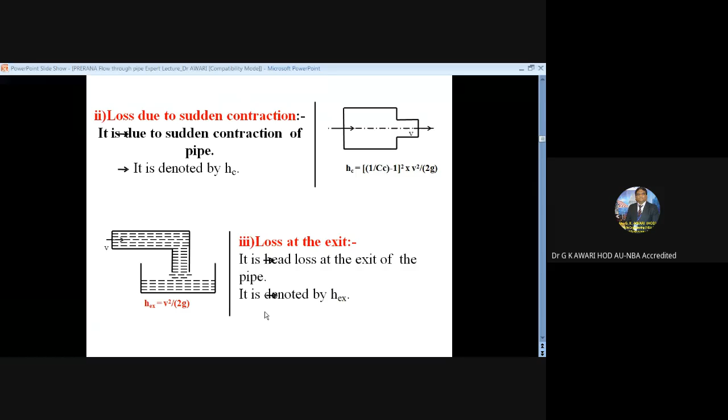Similarly, loss due to pipe fittings is due to pipe fittings like elbows, valves, etc. It is denoted by HB. So HB is equal to K into V square by 2G.

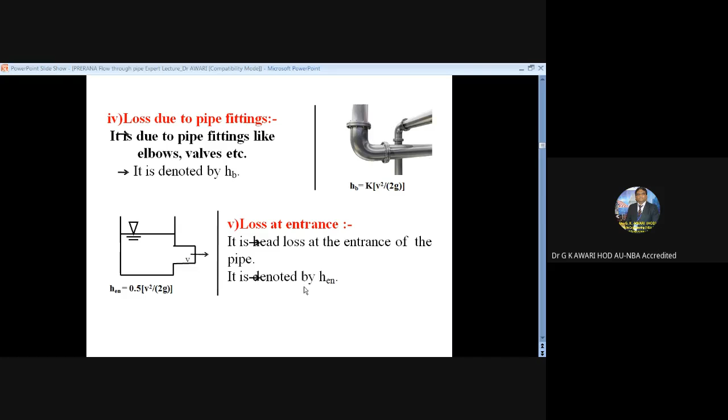So there are the minor losses which are taking place because of the pipe fitting. Then loss at the entrance, you can see here in the diagram, which is given by HEN is equal to 0.5 V square by 2G. So it is loss at the entrance of the pipe. Then the frictional losses in the pipe vary with laminar or turbulent flow.

So the energy equation can be given as P1 by rho G plus V1 square by 2G plus Z1 plus HA minus HR minus HL is equal to P2 by rho G plus V2 square by 2G plus Z2. What is HA? HA, HR and HL are the heads associated with the addition, removal and friction loss in pipes respectively. The head loss in pipes, HL, can be expressed by the Darcy's equation for energy loss.

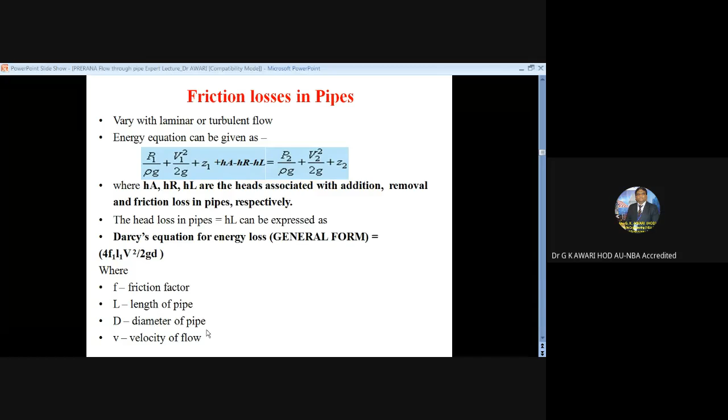So in general form, the Darcy equation is expressed as 4FLV square divided by 2GD, where F is a friction factor, L is the length of pipe, D is the diameter of pipe, and V is the velocity in the pipe.

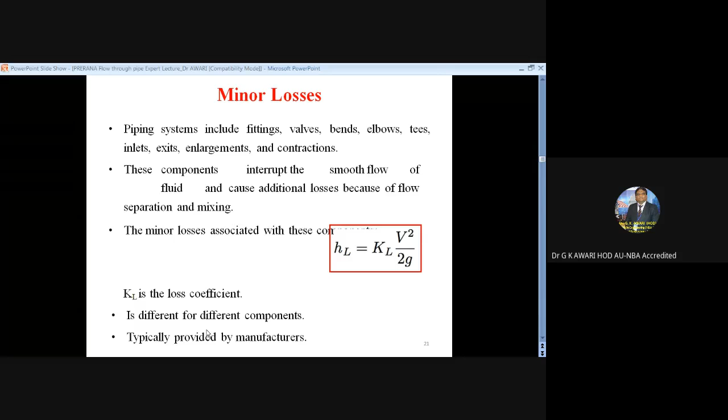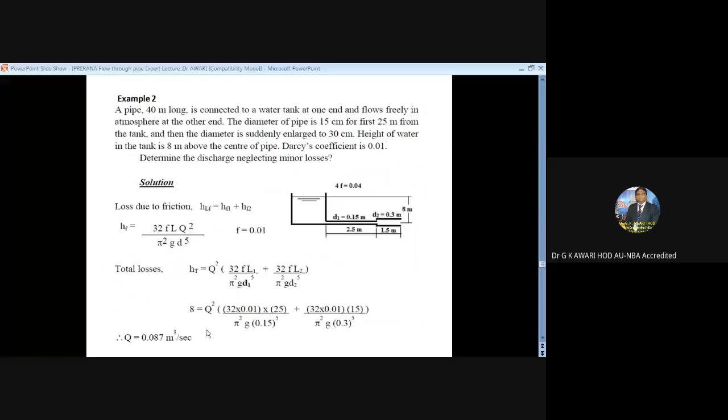So with this we will stop here, and in our next class we will start with the minor losses, major losses, and all these things, and the hydraulic gradient line, flow through nozzle, water hammer effects in pipe. We will take some solved examples and previous GATE examination questions.